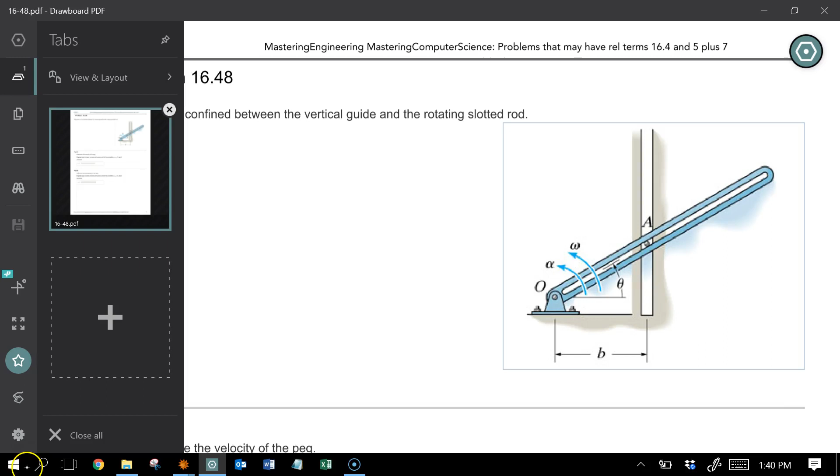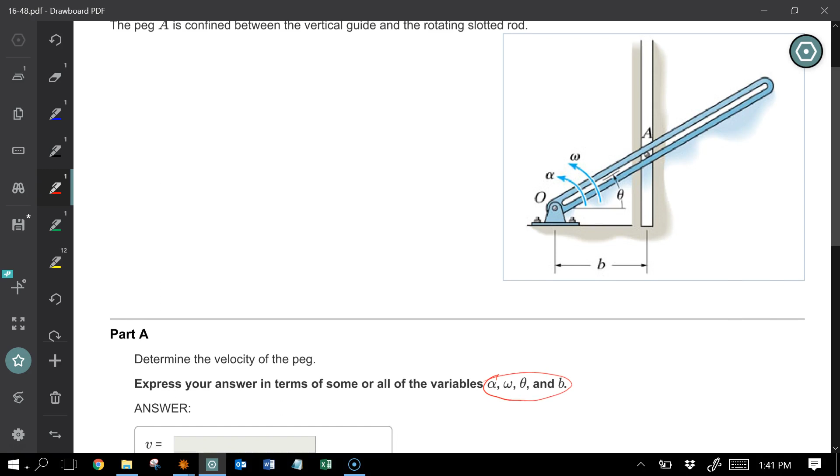Okay, here's another problem. And so we have a peg confined. It asks for the velocity of a peg, and it is given that you know these numbers. Okay, so do you need a free body diagram? Well, it's not clear because it's not a dead giveaway. So count the degree of freedom.

All right, so can something move? Yeah, this slotted arm here can rotate. So that's 1 at least. If you stop it from rotating, the peg can't move, nothing can move, so it's 1 degree of freedom. What 1 degree of freedom means is if you give me one velocity, I can find any velocities. You do, because you're giving me the omega.

Also, if you give me one acceleration, I can find any acceleration, and you do, you give me an alpha. So for this problem, I don't need any free body diagrams. So anyway, it might be easier to use the methods that we've had before, but since we're in rotating bodies, let's go ahead and use that one. I'm going to use special points in this case.

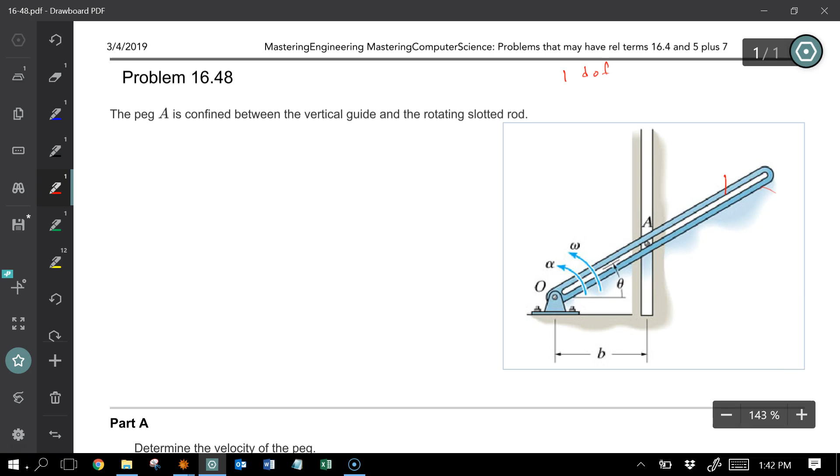First thing to do is to find out how many rotating bodies there are, and there's one rotating body, so we'll call it body 1. Now look for the number of special points. There's a special point here at O. It's special because you know something about it. It's in permanent contact with the ground. And also it's touching two bodies. It's touching the slotted body and the ground.

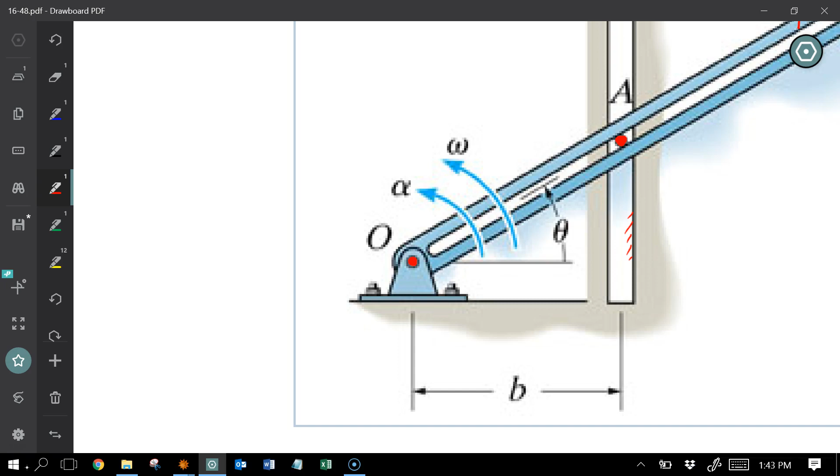Point A is also special because he's touching more than one body. He's touching the ground, sliding along this edge, and touching the slotted body. Also, you know something about it. It's going vertically only. Right? So O and A, there are no other special points. Because there's two special points on the slotted body, you're expecting to write one special point equation. So let's go ahead and do it.

What I'm going to do is choose O and A. So since I want to find the velocity of the peg, that's A, I'm going to start by saying the velocity of A equals, the only other point that's on the body is O, so I'm going to choose the velocity of O plus omega. Now the omega is of the body that they share. There's really only one body, so obviously it's body 1. But point O and A share that slotted body, so that would be omega of the slotted body. I'm going to write S for slotted body.

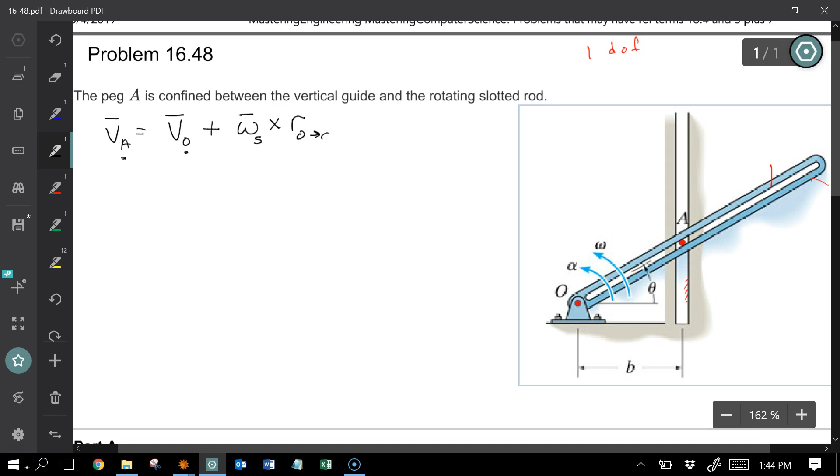Cross R, and it has to go from this point, the one on the right-hand side, to the one on the left. So it's got to go from O to A, plus VREL. Okay, now, are the VRELs 0? You know they're 0 if points O and A never get any closer or further apart from each other. But in this case, they do. A looks like it's going to be getting further away from O as it rotates counterclockwise like this. So therefore, the VRELs are not 0.

Okay, I've written the one special point equation that I'm expecting. So now what I'm going to do is plug in values that I know. So the velocity of A, well, I don't know how fast it's going, but I'm going to call it little va. But one thing I do know is it's got to be going vertically upward because it's crammed into that slot. So that would be in the J. Okay. The velocity of O, what do you know about O? Well, O is in permanent contact with the ground. The table then says that O has got the same velocity as the ground. The ground is not going anywhere, so that's 0.

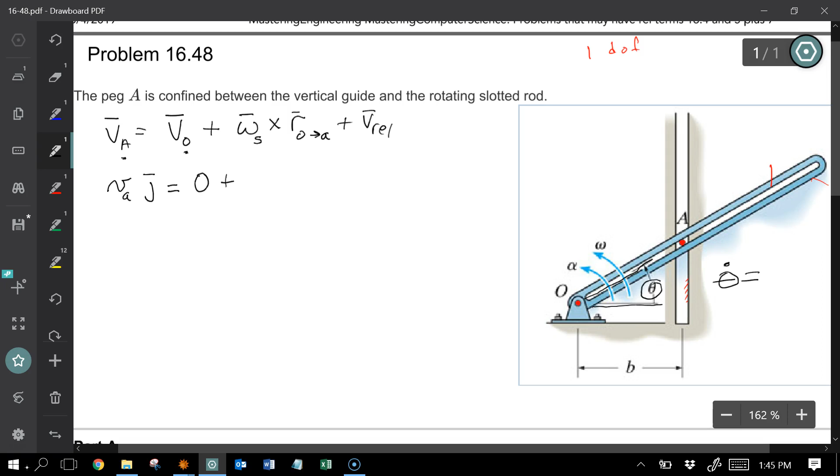Okay, omega. Now, the slotted arm has simple angular velocity. If it has simple angular velocity, then I paint a line on the body, I paint a line on the ground, and I define the angle between them, and the rate of change of that angle is equal to the angular velocity. That's what the book is calling omega. So this guy is equal to omega. So that would be the value W.

I have to determine what direction. So if theta is getting bigger, theta dot is positive. If theta dot is positive, it's going counterclockwise the way the arrow shows, and that would be in the k direction. I guess I should have said I is right, j is up, like usual, and then k is counterclockwise. All right, so this would be a positive k. Cross. Okay, R from O to A. All right, I don't really know this distance here, so I'm going to call it L.

And R from O to A is going to equal L cosine of theta in the I direction, positive I to the right, and I'm going to go a distance L sine theta, and I'm going to go up. Up is a positive J. Now let's get the VREL terms.

The way you get the VREL terms is you pretend like you're standing on the body that they are sharing. So you're standing here on this body. So what that means is everything around you looks like it's moving, but the slotted body doesn't, because the slotted body is beneath your feet and it stays beneath your feet. Then you ask yourself, what is it that you see happening? I see O sitting still because he's at the end of a rod that I'm standing on. But A looks like it is moving in this slot.

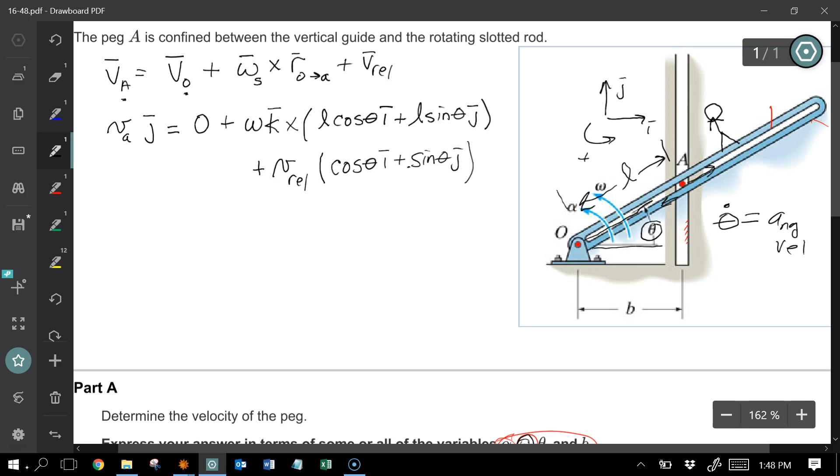I'm going to assume he's going out the rod, and so the direction that he's headed is going to be cosine of theta to the right, and he looks like he's going up a little bit, sine of theta, up. So that would be out of the rod. If you wanted to say he was going in the rod, then he'd be going left and down. And so there'd be two negative signs there. Okay, but let's do out the rod, because I don't like negatives. Okay, so that's assuming he's going out the rod.

Now, the next thing that you're going to do is the cross products. So let's go ahead and do the cross products. So VA J equals, let's see, WL cosine theta. K cross I is equal to a positive J. And then I have another one, omega L sine theta. K cross J is a negative I. And then I have these other terms, VREL cosine theta I plus sine theta J.

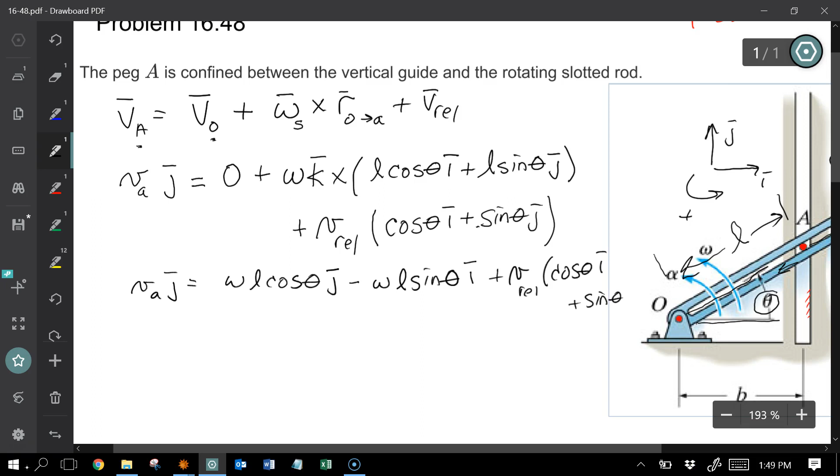Alright, so extracting the equations, you have 0 i's over here. That equals minus WL sine theta plus VREL cosine theta. And then the j's, VA, equals WL cosine theta plus VREL sine theta.

Okay, so the top equation, I'm going to solve that guy for VREL, because I know omega. So VREL is equal to omega L sine theta divided by cosine theta. Then use that in the bottom equation and you get VA, the speed that I'm looking for. VA is equal to WL cosine theta plus VREL, that's WL sine theta over cosine theta, times the sine of theta.

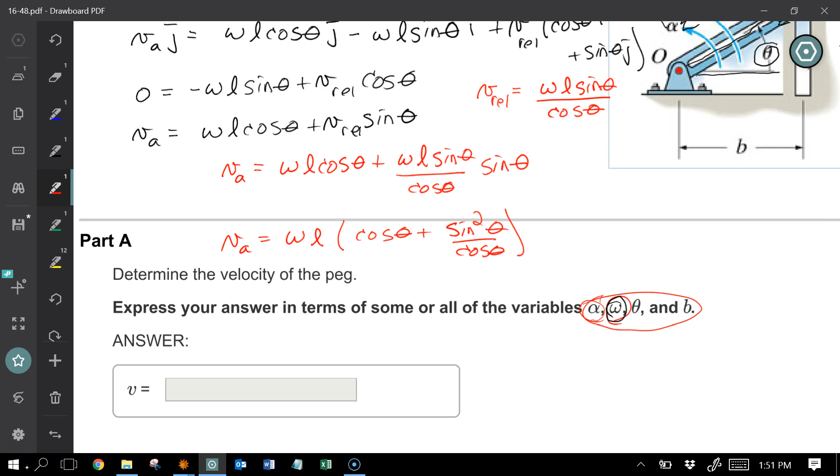Alright, so if you simplify it a little bit, VA equals WL times cosine theta plus sine squared theta over the cosine of theta. Now they wanted it in terms of W, which I have, theta, which I have, but I have L instead of B, so you need to find the relationship between L and B.

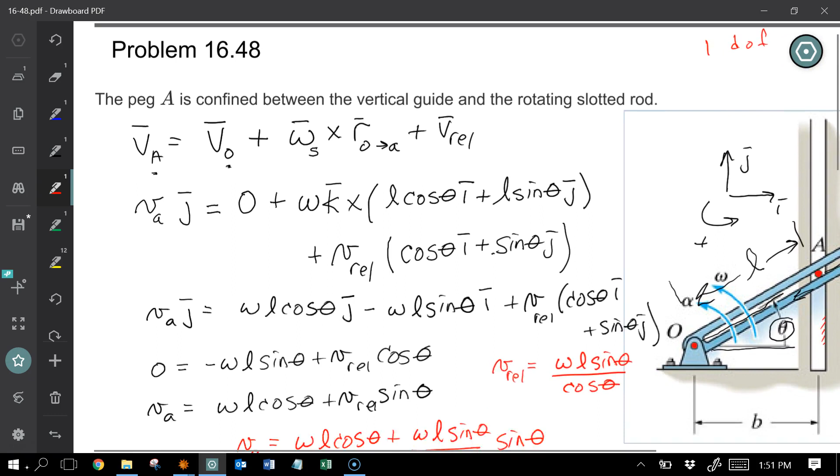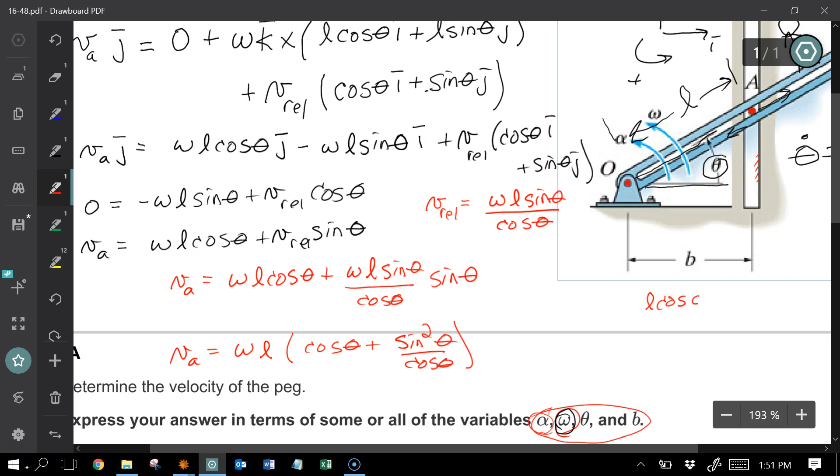So you ask yourself, is there one? Yes, of course, because there's 1 degree of freedom. If you know one distance, you know you can find the other distances. So in this case, that's not too hard. It's a right triangle. So L cosine of theta is equal to B. So L is equal to B divided by the cosine of theta.

So I'll put that in over here. So if you take this and put it in right over here, you'll have everything in terms of omega, theta, and B, like they wanted. If you really want to simplify it, it would be omega B times 1 plus sine theta over cosine theta squared. There we go.

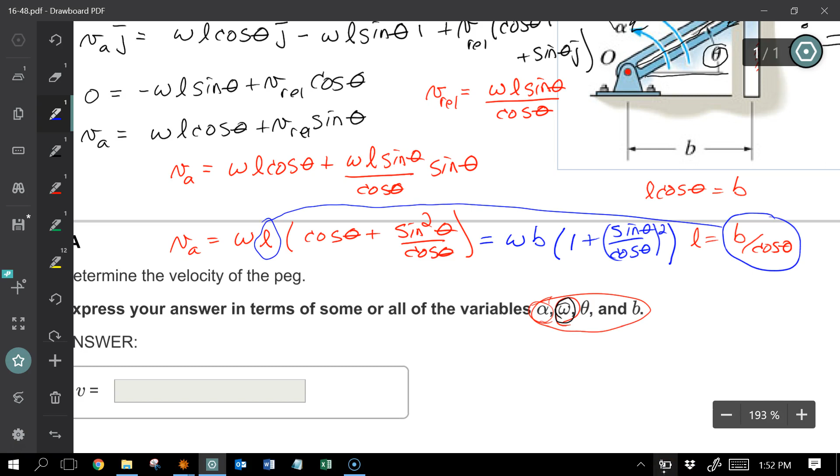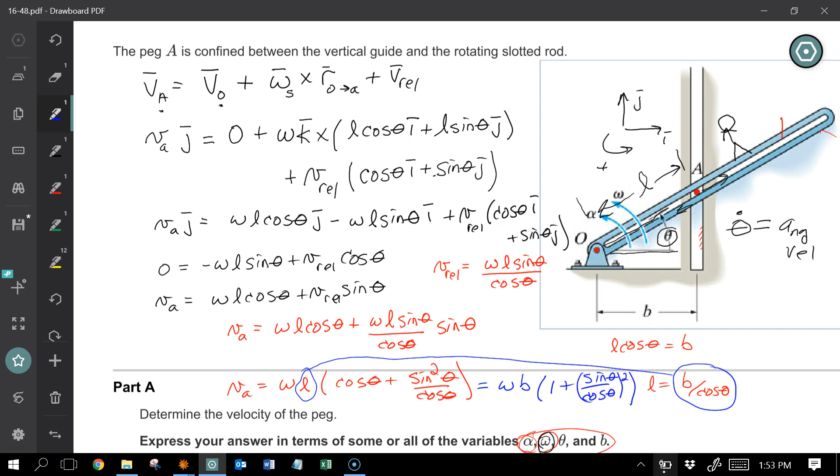Okay, so that's the first one. To do the acceleration, you're going to mimic the velocity equation. So I'll pause. I'll come back and do that again.